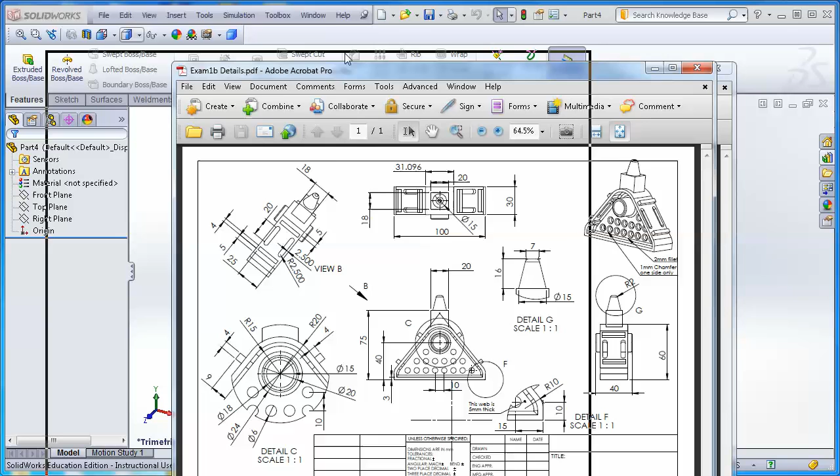We're going to be giving you this picture, but we'll also be giving you this detailed view of the part. Let me drag that into place, and you can see that this drawing is loaded with dimensions. And so this is where you'll be looking up and finding the dimensions for the part. And this simpler sketch is where you will get just the overall understanding of the geometry that's there.

And what I want to do is start off by sketching the outer boundary, which represents the bulk of this part, and just show you how to read this drawing with all the details on it that I showed you a second ago, to learn how to make the part, and a few sketching tools. So first thing I'm going to do is create a new part. I'll do it with File, New.

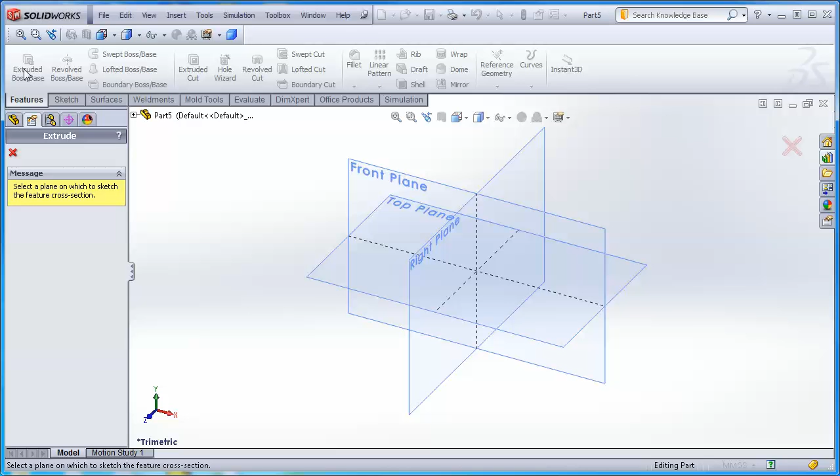I'll select a part, OK, and then I'm going to make sure that this part is set up in metric units. We've done this plenty of times before, so we'll go to units and set it up in metric units, millimeters, and I'll say OK on that dialog box. Now we're in millimeters, and I'm going to create the first extruded boss base, and I'm going to do that by sketching on the front plane.

And the geometry that I want to create is this thing, which looks like a triangle, a little more than a triangle with curved edges to it. And so there are lots of ways that this thing could be created. What I'm going to do is look at the sketch with dimensions on it and learn a few things about this part. I can see in this view that this part is an overall 100 millimeters wide. It is 30 millimeters deep.

And now this shape that I'm going to be sketching right here, there is no dimension to the top of this circular piece. But notice there is a dimension of 40 to the center of this circle. And then over here we have radiuses of everything. And this is a radius of 20. And this radius at the top of the part is at the same center as this hole.

So what I'm going to do is sketch the outer part, sketch that circular hole at the middle of the part, and then do a little bit of constraining work to control how this arc at the top interacts with that circle. Another thing I'll note is these flanges around this part are 3 millimeters thick, so we'll come back to that a little bit later.

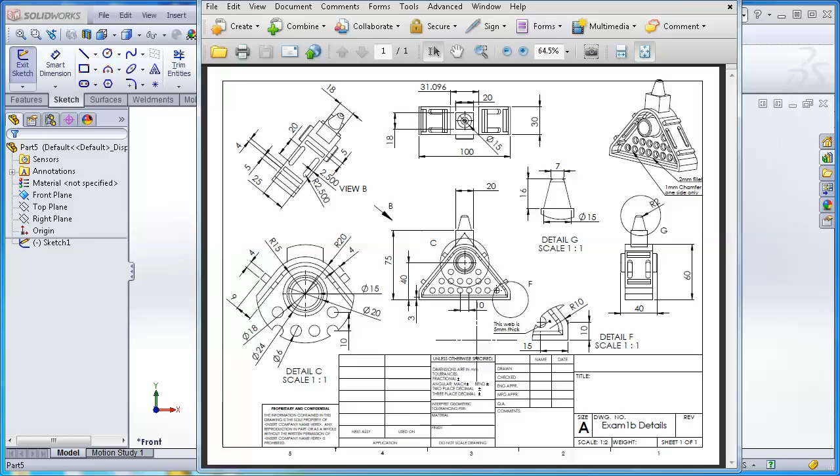And so what I'm going to do first of all is create a line, and I want it to be on the same height as the center of my coordinate system, so I'm going to let that projection line stand, and I'm going to click there. Then I'm going to move over to the right, and I'm going to allow my line to be horizontal. And so I've just created a horizontal line.

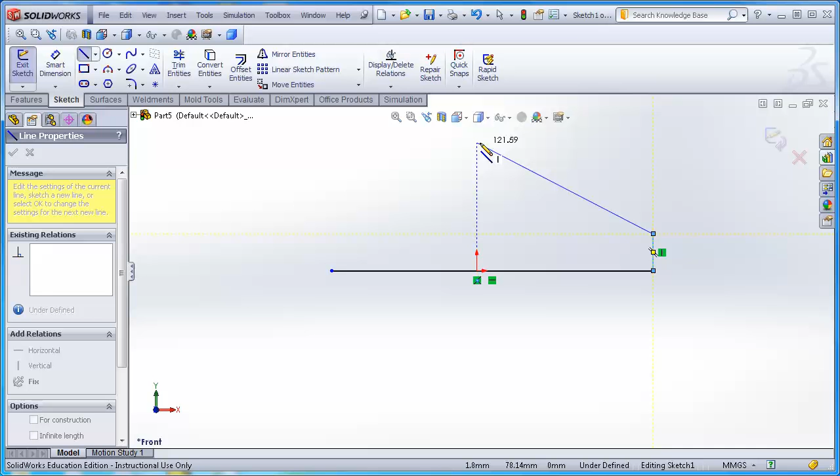Now I'm going to move up a little bit, and then I'm going to move over, and I'd like the endpoint of this line to be right above the center of my coordinate system. I want the endpoint of this line to be right above that endpoint. Notice I'm not worrying about angles and other things. And then I want to close my sketch.

And I've just used lines at this point. I'm going to hit escape. And now what I want to do is some constraining. And it's things we'll show you in a bit more detail next time. But I want to do some things like claim that these two lines have to be of equal height.

So let's do a constraint. I'm going to click on this line, and I'm going to hold down Control and click on this second line. And then I notice down here that equal is one of the options. I'm going to make those two lines of equal length. Okay. Then another thing, and I'm going to accept that.

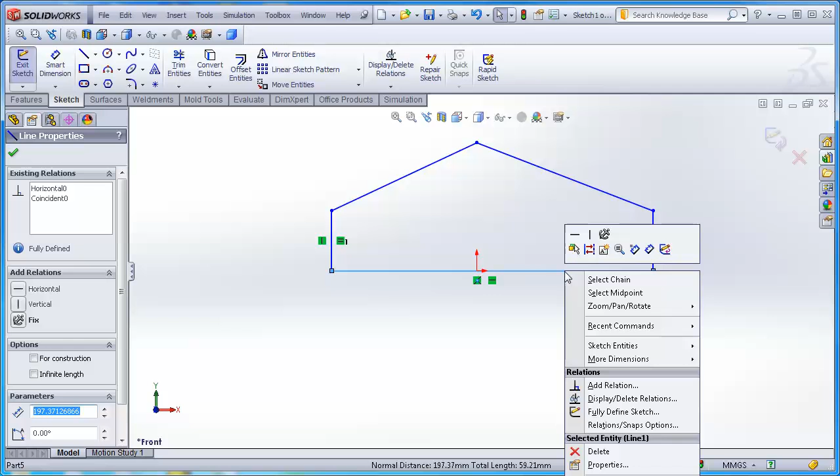Another thing that I want to do is to find the midpoint of this line, because I want all of this to be symmetric about this coordinate system. I'm going to find the midpoint of this line and force the midpoint to be at the center of the coordinate system. So I'm going to right click on this line, and I've got to find the midpoint option. It is here. Select midpoint.

That's selected. Now I'm going to hold down Control and select the center of the coordinate system. With those 2 points selected, and notice they show up in the box right here, I'm going to click on coincident. That makes those points become the same. And now, with the midpoint of this line hooked to the middle of the coordinate system, this point is right above the center of the coordinate system. I've got some built-in symmetry just from these constraints.

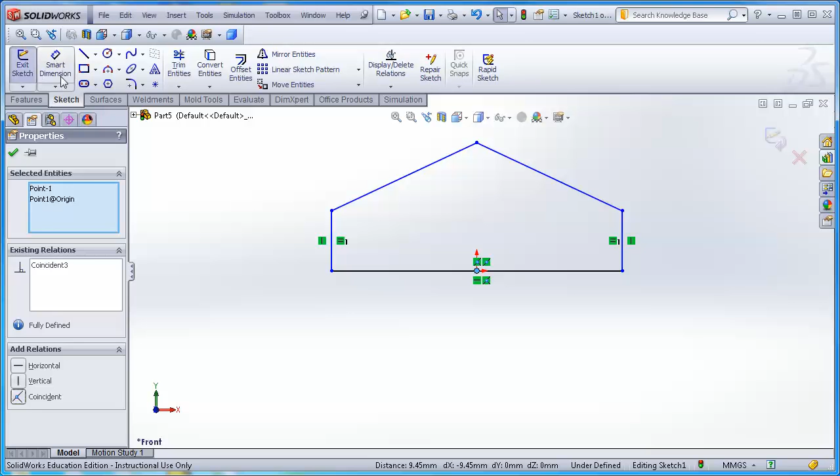Now I'm ready to do a smart dimension of 100 here. I read that from the drawing earlier. And this one moved on me. I'm not sure why it moved. I thought I had a constraint built in, but I'm going to fix that with a constraint.

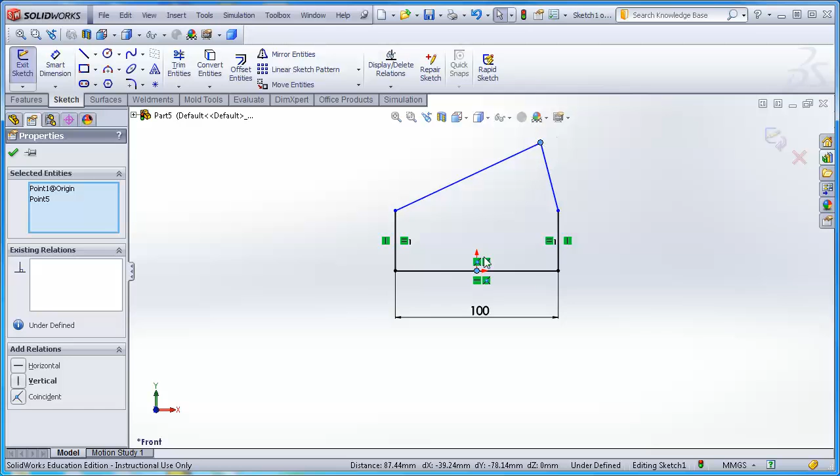I'm going to click on this point, hold down Control, and click on the center of my coordinate system and the midpoint of this line, which is now the same thing. And I don't want this point to become coincident with that point. That would bring them together. I want the 2 points to be vertical. And that restores my symmetry.

Do you see all these little green marks all over the place? These marks are indicating the constraints that I've built in. That equal and this equal, number 1, say that those 2 lines are equal. This vertical line says that line is vertical. If I point to it, it says vertical and vertical. If I point to this one, it says coincident. That says the line is horizontal. That says coincident. Midpoint, vertical. The constraints that I've created are there.

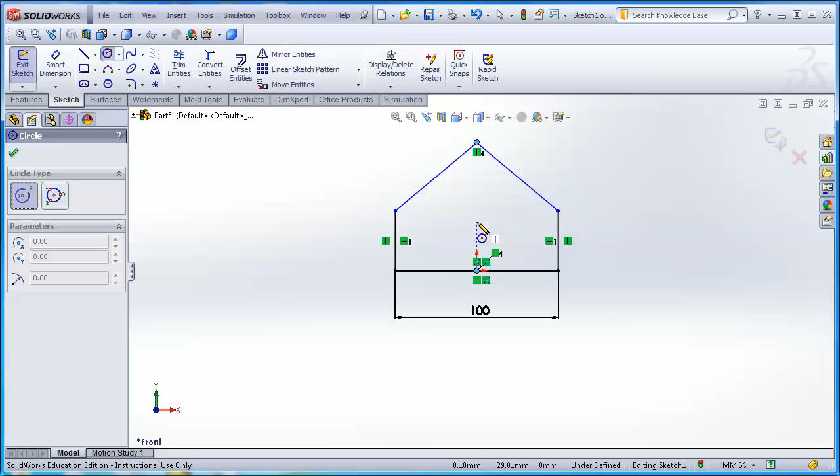Okay, next thing that I want to do, now that I've got this thing in the neighborhood of the right size, is create a circle. So I'll go to the circle tool. There are several kinds of circle tools. I'll click on circle. I'd like to place the circle so that its center is right above the origin of our coordinate system. So by allowing that line to project down, I click on the center and I drag away with no mouse down, and I click somewhere, and then I could type in a dimension now.

I'm just going to go ahead and go to Smart Dimension, click on the circle, pull away, and I'm going to pull the drawing back in for just a second, let's find the size of that circle. If we look carefully at all of these different radiuses, where do we find an arrow that ends on that circle? And the answer is right here. That's a diameter of 15, and that arrow ends at that inner circle. So I'm going to dimension that to a diameter of 15.

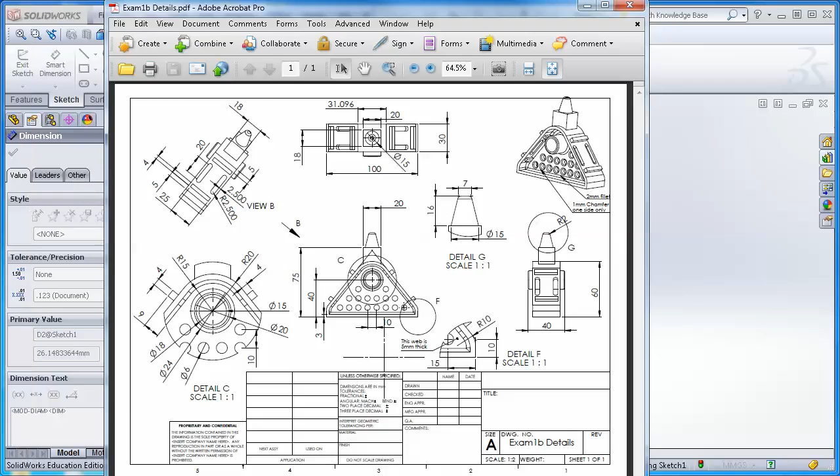15. Oops, I got to click back into this program. 15. Enter. And that is about right. Now, let's see. Let's get some other dimensions off of this thing.

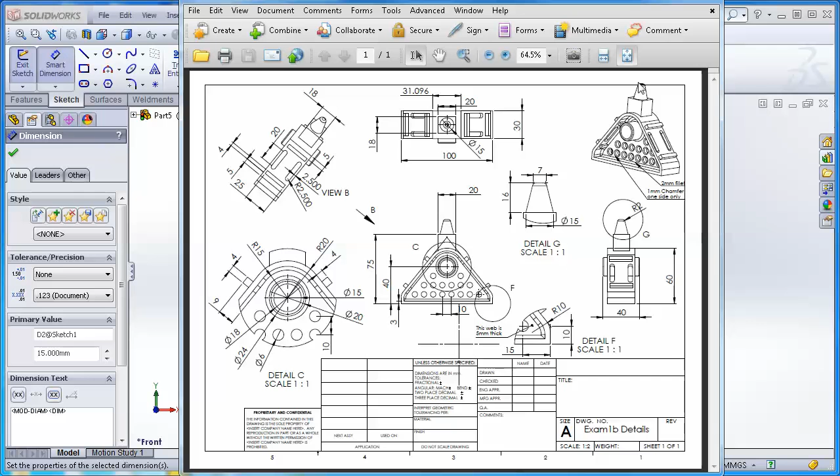Looking at this corner with an enlarged view, you want to look at this very carefully. You're going to see a curve here, but also 2 straight lines. And what's been dimensioned to a dimension of 10 is the intersection of those 2 straight lines. That sets the height of that side part.

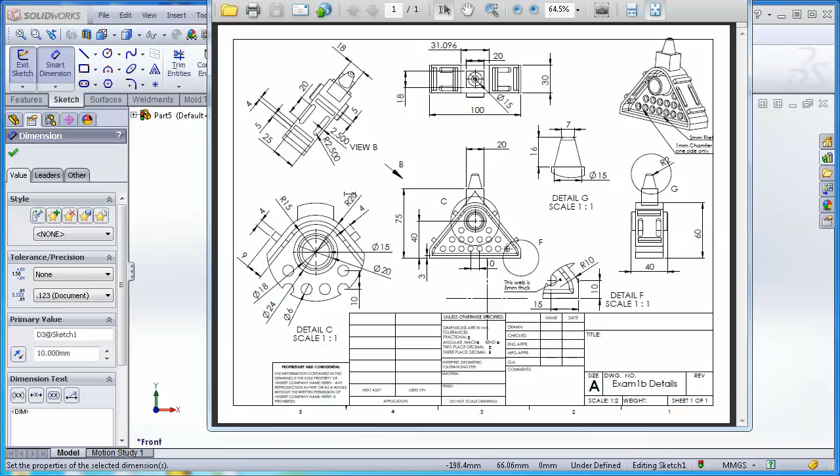And so I'm going to smart dimension that line to a height of 10. Okay, and now it appears that this thing is way too tall, but we will deal with that in just a moment. Let's see, by creating a radius, and it is this top radius right here, that has a radius of 20 measured from the center of that circle.

Okay, and so what I'm going to do, and we haven't done this yet, I'm going to create a thing called a fillet. We looked at fillet features. This is a very similar thing, but it applies in sketches, and it creates a fillet curve. So I'm going to create a sketch fillet, and it's going to involve this end of this line and that end of that line, and I can see it previewing for me.

And I want a radius of 20 millimeters, and that gives me that fillet. You can see it in yellow. I will accept it, and I can see the radius of 20 showing up for that dimension.

Now, about the only thing wrong with this sketch is that I want this point, which is the center of that fillet radius, to be at the center of this circle. And so I'm going to do that by clicking on that point, and I'm going to hold down Control and click on the center of the circle. And I'm not sure why it offers the word merge rather than coincident, but I'm going to merge them.

Okay, and in this case the circle moved because I had not yet dimensioned the center of the circle. I just forgot, but it's not going to hurt anything. The order is not important, and so I'm going to accept that.

And now what I want to do is smart dimension the distance from that point to that line, and I will pull that out there, and that distance on the drawing is given as a 40. Let me point that out to you. Right there, that 40 is the distance from the center of the circle to the bottom of the part. And so I'll type in a 40.

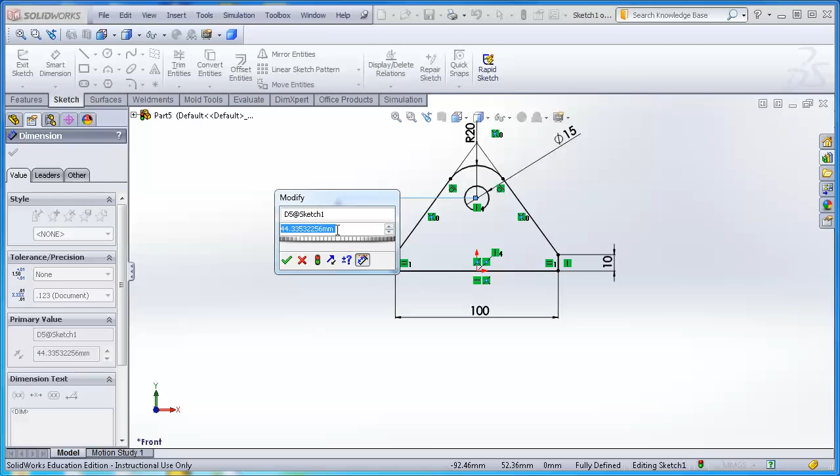And I'm almost done. I still need a fillet at these corners, but everything so far, everything is black, right? But I still need to create a little geometry, and so I'm going to do a fillet at this corner between those two lines. It says I'm in trouble, and I understand, but I do want to continue, but I'm going to change this to the right number, and we'll go find the size of that fillet.

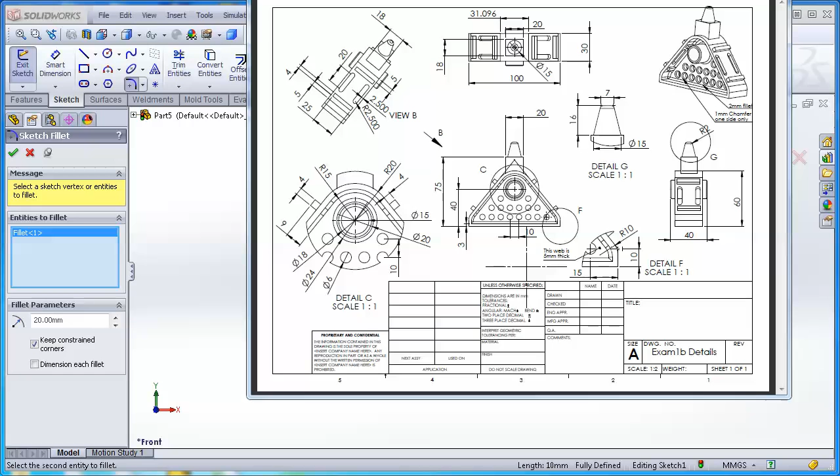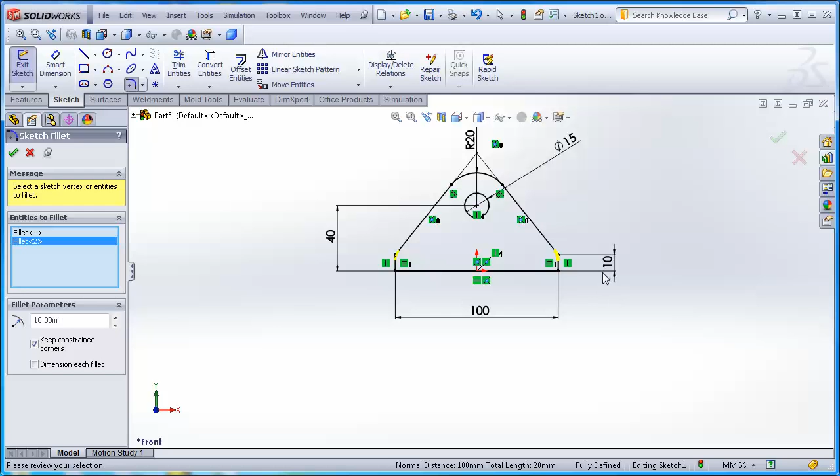And right here it says that this fillet has a radius of 10, not 20. And that's why I was in trouble, because of that 20 that's sitting right here. So there's a radius of 10, and I'm going to accept that one, but I'm going to put another one while I'm at it right there. It said the same thing, but oh, okay, what's happening is I've dimensioned to that intersection point, and it's saying that intersection point's going away. I'm going to accept that.

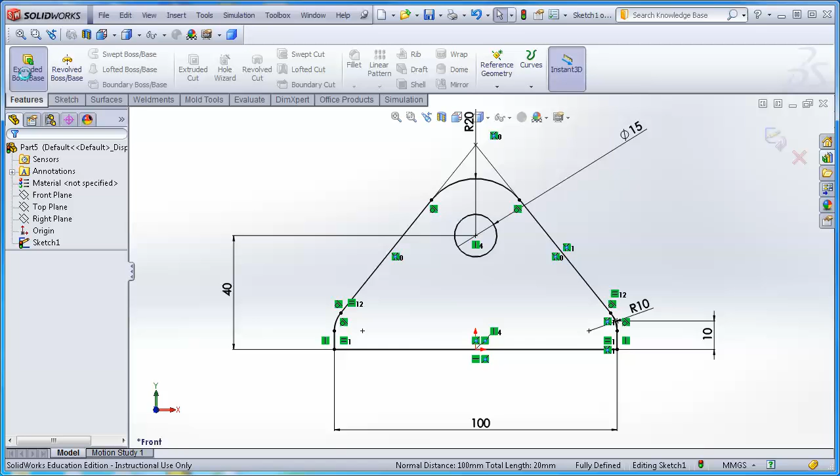My sketch is black. We'll zoom in a little bit and take a close look at it, and I believe I've got everything I need in that sketch. That sketch is done. Now I'm going to extrude by doing an extruded boss base with that sketch.

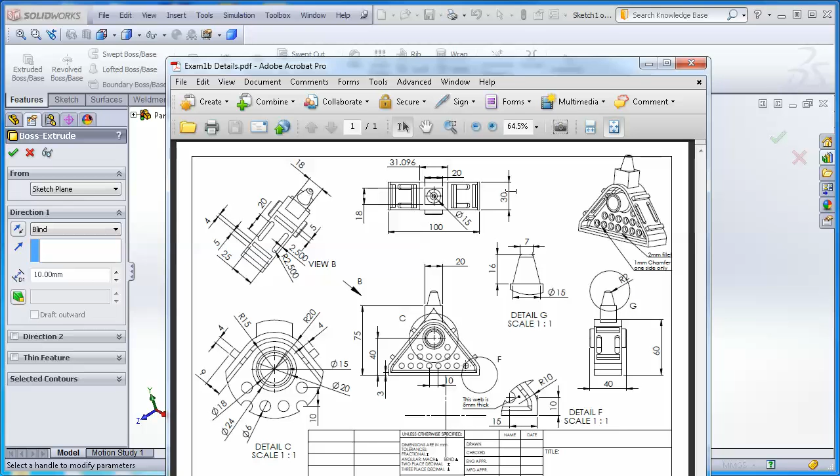And in preparation for things to come, I'm going to be smart, not by extruding blind a width of 30, because there's an awful lot of symmetry on this part. So I'm going to presume that my front plane sketch is actually in the center of the part, and I'm going to do a mid-plane extrusion. We saw that last time. So I'm going to not do a blind, I'm going to do a mid-plane and type in the total width of 30.

But with that, it creates 15 on each side of the mid-plane, and having that front plane there in the middle of the part is going to be convenient later.

Okay, the one other thing that I want to show you involves sketches, so I'm going to do a sketch. I'm going to do an extruded cut. So let me go to extruded cut. I'm going to sketch on that face and view perpendicular. And I'm going to use a very powerful tool called, let me find it, offset entities. It'll take existing geometry and offset it by a certain distance.

So I'm going to click on offset entities, point to that edge that's on the part and give it a click. This isn't behaving the same way that it did for me earlier, but I know first of all that I want to offset 3 millimeters, and I want to reverse. Last time I did this, it went all the way around. I don't quite remember what it takes to get them all, but I'll just do the clicks because that certainly always works.

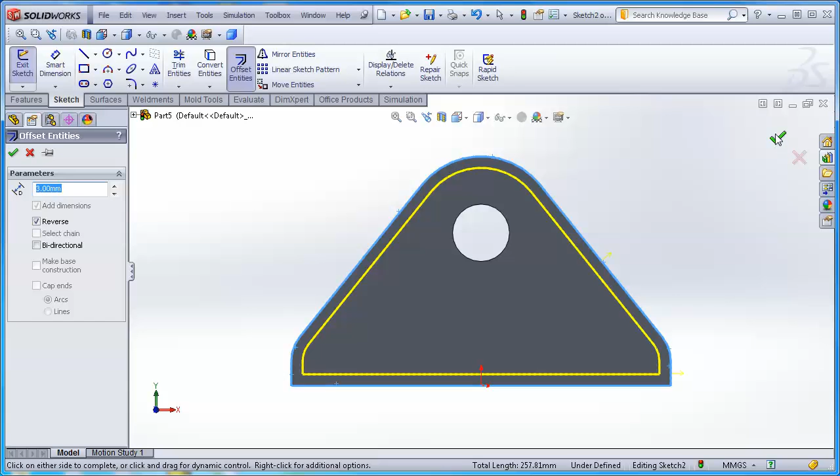And I have created that geometry, and I will accept it, and notice it's all black. Only one dimension of size 3 was needed to create this interior geometry. It did 3 millimeters all the way around. The sketch is black. I will accept it.

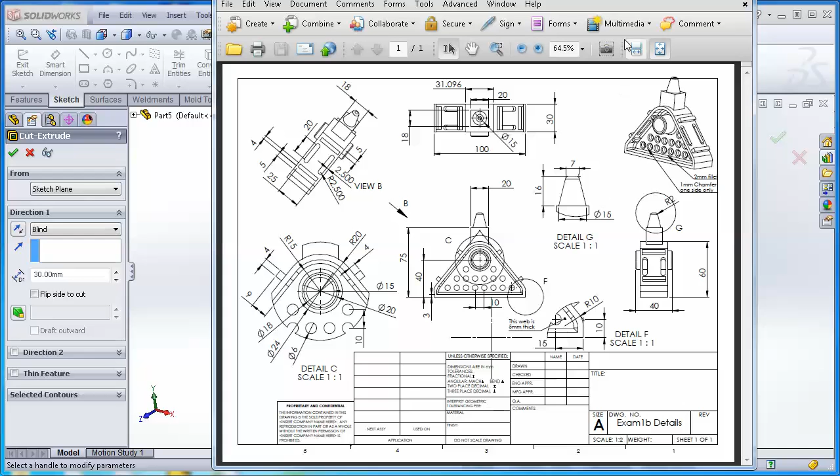Now, the cut that I intend to do, let's look at our drawing. You have to look carefully to find it. Let me remember where it is. Here's a note. It says this web is 5 millimeters thick. It's not showing up anywhere else, so you've got to scan the drawing carefully for information about the size. This web is 5 millimeters thick.

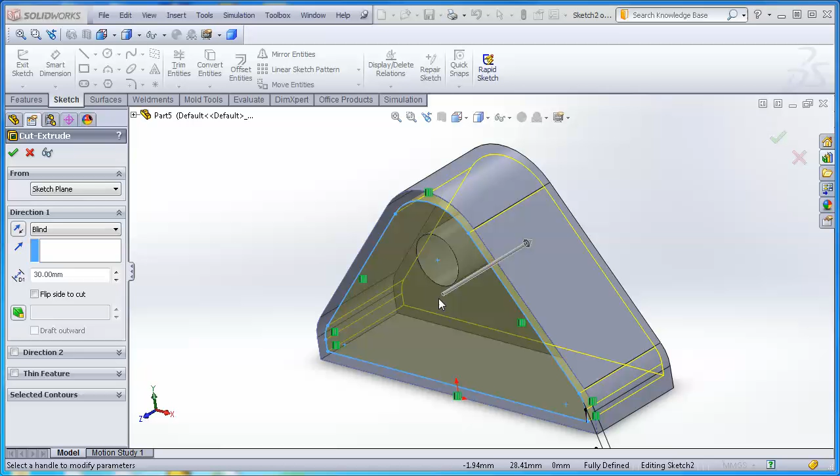If that's the case, then if I'm going to do my cut, first of all, I don't want to go past the midplane. I want to stop before the midplane 2.5 millimeters. I could do the calculation: 30 divided by 2 is 15, then minus half the thickness of the web, 2.5, and that would get me to 12.5. I'm not going to do it that way. Instead, I'm going to use offset from surface. Now we haven't shown you this yet.

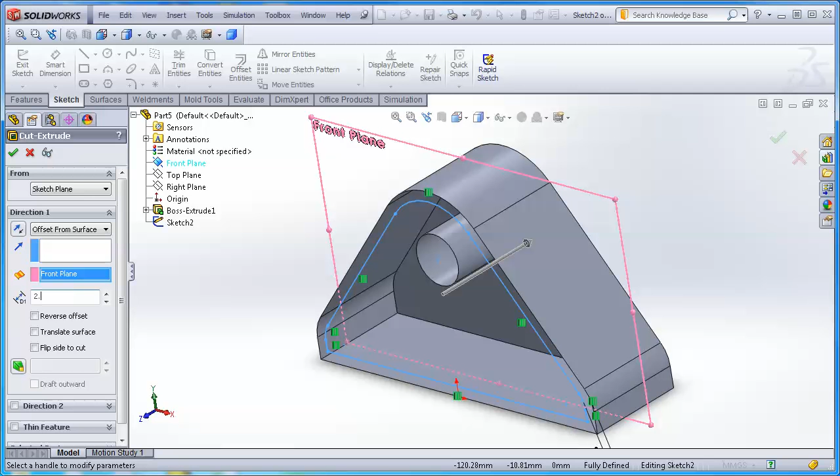I'd like to get to my front plane, but it's not visible. Over here is a collapsed model tree. If I click on it, I can find stuff that's already created, and I'm going to use the front plane, and I want to offset from my front plane 2.5 millimeters. And so my cut does not go all the way through the part. It stops 2.5 millimeters away from the front plane, and that is that cut. I've made that pocket.

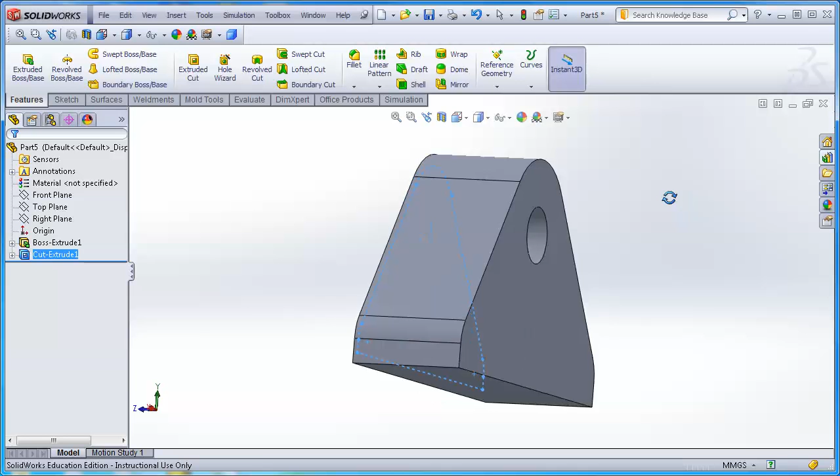Now I could go do the exact same thing on the other side, but if it's the exact same thing and it's on, quote, the other side, one of the tools that we showed you today in our lesson would make creating this pocket on the other side quite easy. But if you look at the part, there's a whole lot of stuff that we haven't created yet on this side that eventually will also go to the other side. So it's probably better to create a bunch of the stuff on this side and then use that sneaky tool that I'm not naming for you to move all of that stuff to the other side as well.

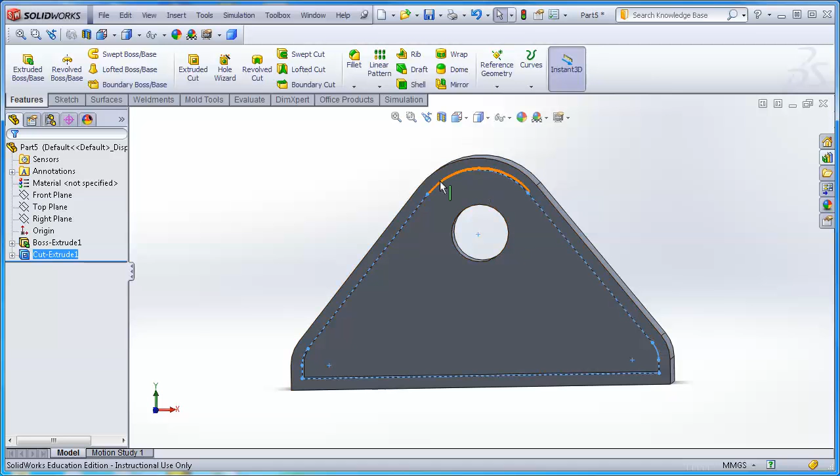And so that's the end of this video. And now what have I shown you? I've shown you fillets. I've shown you a lot of constraints. Click on one, control click on the other, force them to behave the way you want them to behave. And I've shown you the offset entities. Those are the main things that I've shown you. And so that would end this video.